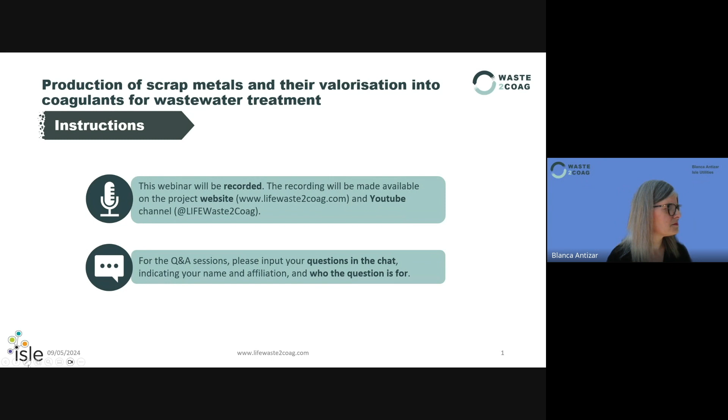So the LIFE Waste2Coag project, as I mentioned, this is webinar number 2 of the project. The focus of this second webinar is on the production of scrap metals and their valorization into coagulants for wastewater treatment. This project is funded by the European Commission through the LIFE program.

The objective of the series of webinars is to raise awareness of the capabilities of the project, targeting a wider pool of stakeholders. We also would like to improve the overall knowledge of the project with a view to responding to market needs, particularly in Europe, but also beyond Europe.

The structure of this series of webinars is as follows. We have 3 different topics that we want to touch upon. The first webinar, which took place in July 2023, was on brine generation - you can access it on our web channels. The second webinar today is on scrap metals and production, which is the topic for today. Then we'll have a third and final webinar towards the end of the year on the use of coagulants.

Each webinar includes at least 2 presentations from stakeholders of the project partners who have experience in the specific topic of each webinar. We also provide an overview of the project for everybody to keep up to date with the purpose of the project and any particular progress.

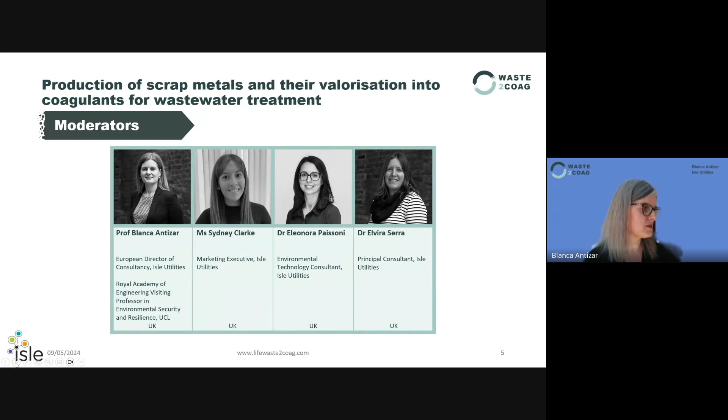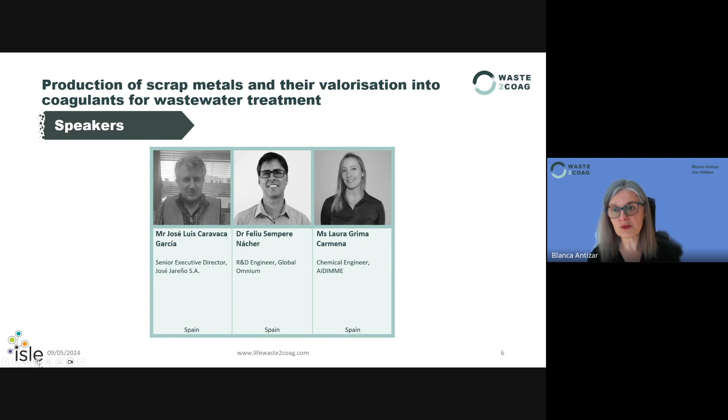So we have 3 speakers today: one expert from the sector, Mr. José Luis Caravaca García, and then 2 project partners, Dr. Feliu Sempere Nácher, and Ms. Laura Grima Carmena from Global Omnium, which is the coordinator of this project, and AIDIMME, which is one of the partners in the project.

The agenda for today is as follows. First is the introduction to the webinar, and we are on that section at the moment. Then I will share the floor with Mr. José Luis Caravaca, who is going to be speaking about ferrous scrap recycling in Spain. We will pause at that time to ask him questions.

So we'll use the questions that you put in the chat for José Luis. Then we'll move into the presentation of 2 of the project partners, Feliu and Laura, speaking about relevant project advances. At that point we'll pause again for questions and answers, and then we'll close the webinar. The webinar as a whole is going to be about 1 hour.

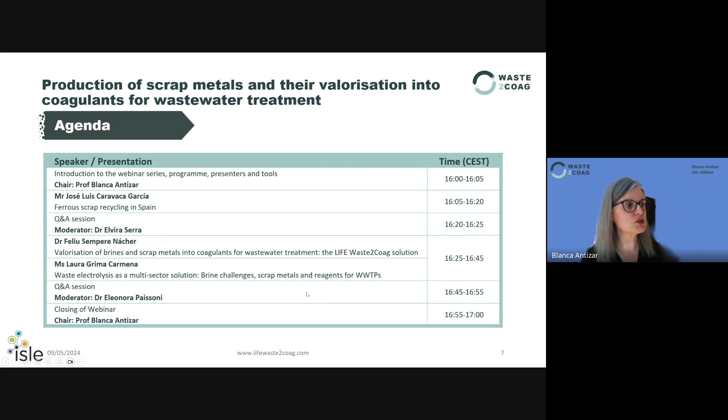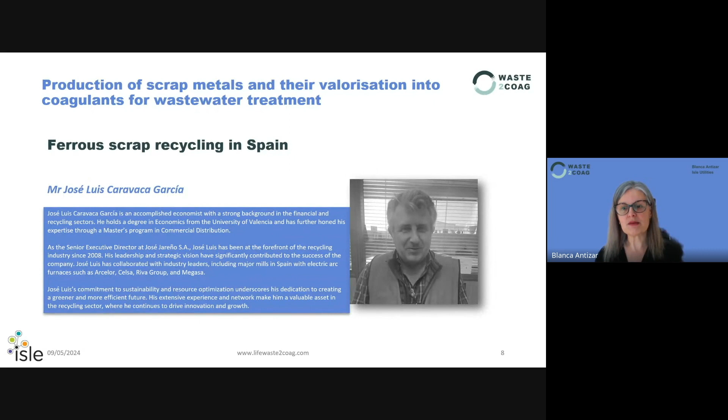So just to introduce briefly, José Luis is an economist with a strong background in the financial and recycling sectors. He's a senior executive director at José Jareño Sociedad Anónima in Spain. José Luis has been at the forefront of the recycling industry since 2008, and I'm not going to be shy to say he has been a pioneer in sustainability and innovation in the recycling industry. We are delighted to have him here today with us. Thank you, Luis, for being available - he will be talking about ferrous scrap recycling in Spain.

We are a recycling and waste management company with extensive experience in the sector. We are always committed to continuous improvement and innovation in our processes and management. We have a team of nearly 100 people with experience, knowledge, and specific qualifications. We own the means and equipment, with machinery specialized in the valorization process.

Don't worry, we have the machinery. We have 3 scrap metal shears, 2 copper wire mills, and 4 scrap balers, and finally, at this moment we are installing a big shredder. On the other side, we have a fleet of vehicles, container on-site collection, and mobile car presses.

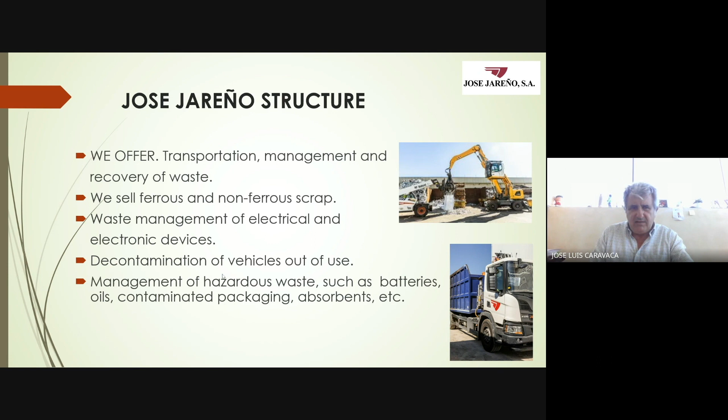You can move to the next one, Blanca. Okay, at this moment I've explained more or less the work that we do here at José Jareño.

Today I arrived a bit late because we had to take on 2 demolitions: one marble factory in Alicante, and the other a farm that was burning for 15 days, a farm of hens and eggs. One of our works is to do demolition.

We buy scrap, ferrous and non-ferrous, from factories. They produce material for new vehicles, like here in Valencia with the Ford company, and many of them work with us. Nowadays Volkswagen is preparing a big plant for batteries, and we work for all of them to pick up the waste, the scrap. That's more or less what we do here in Valencia.

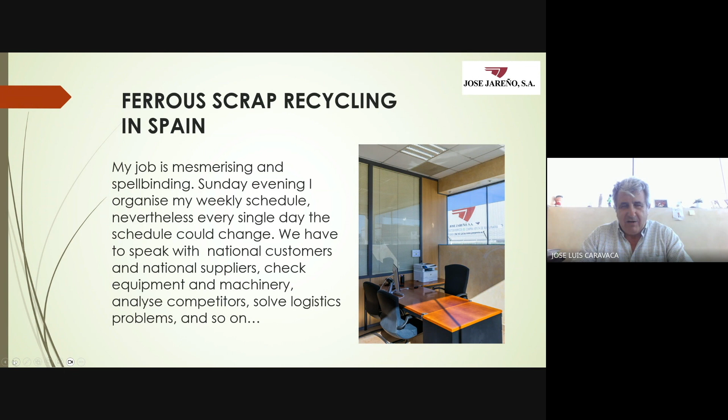We have to speak with national customers to buy scrap. You have to have the price of the sale before you buy, otherwise you don't have the price to sell. We speak with the national customer, the national supplier, to buy, check the equipment machinery, analyze competitors, solve logistics problems. Every moment. Right now I have a phone call about a problem, and after this I will solve it.

What happened? Every day, what happened? Price changing. I came from Madrid this morning. On this trip, I found I had to ask for better prices, changing.

Another thing is competitive movements. I don't work with all the EAF in Spain, all the mills in Spain, I work with several, but not all of them. Then the competitors change the prices, and I have to follow the market, to ask my customers for the better prices. Machinery doesn't work, every day it's broken, every single day.

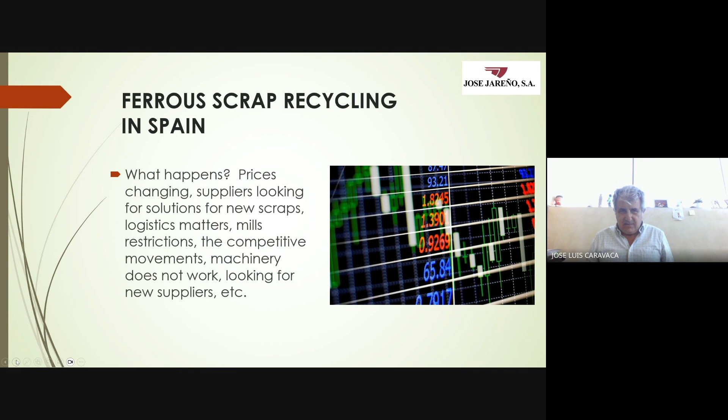You must keep looking for new suppliers because the market is always changing. You need to look for new suppliers.

One problem in the market, in non-ferrous and ferrous scrap, is reputation. We don't have a good reputation, but it's changing. One example is the LME, the London Metal Exchange. You can see this on Google, everybody can check the London Metal Exchange for the prices of metals or scrap, ferrous and non-ferrous, copper and so on. It's intended as a primer for those who want to develop their understanding of how commodities and metal markets work.

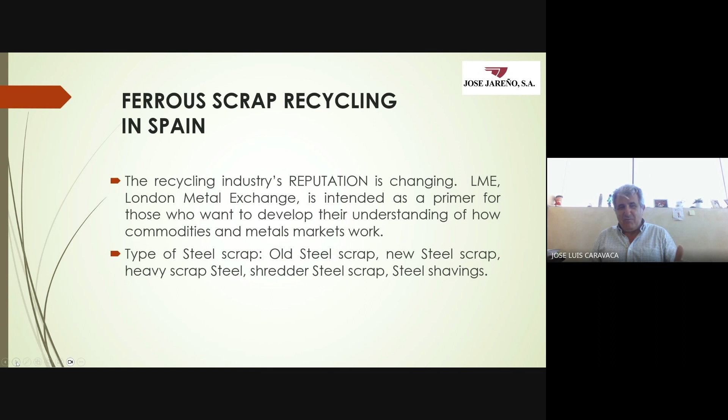Now we'll speak about the type of steel scrap, which is not too complicated: new steel scrap from factories producing cars and so on, heavy scrap steel, shredded steel scrap, steel shavings. The type of steel scrap is easy. The problem is the person who manages the scrap - the customer and supplier - not the scrap itself.

Now we are speaking about the figures of steel in Spain. The steel production in Spain is stable or decreasing. Nowadays the work with steel is more usual in countries like Asia, better than Europe. The steel production in Spain is stable or decreasing because the production is cyclic.

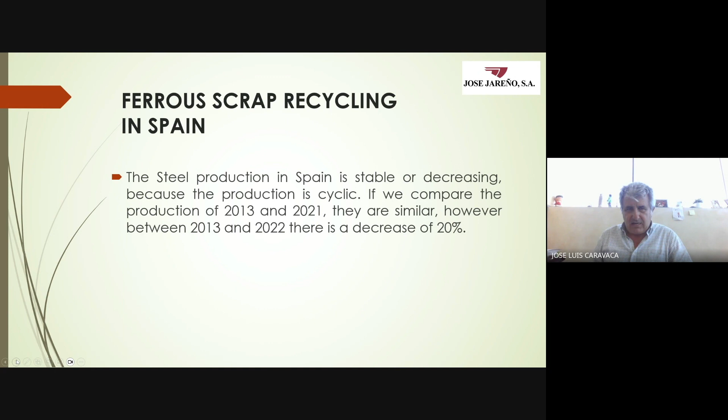If we compare the production of 2013 and 2021, they are similar. However, between 2013 and 2022, there is a decrease of 20%. In the table, worldwide production versus Spanish steel production between 2013 and 2022 shows it had decreased.

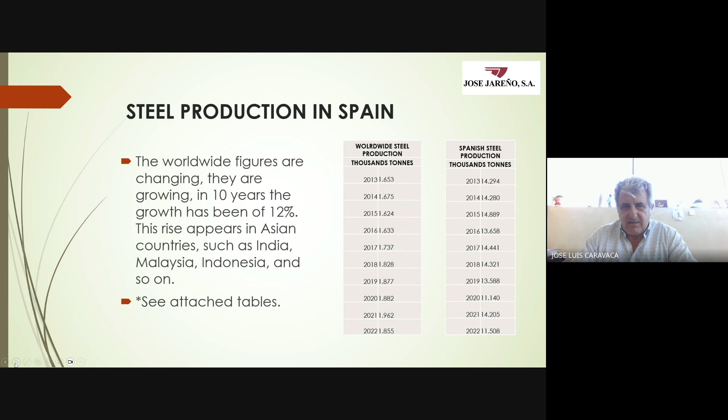After, we can see the map of Spain with the mills working now. The worldwide figures are changing - they are growing. Over the years, the growth has been 12%. The rise appears in Asian countries such as India, Malaysia, Indonesia, and so on. That is the change from Europe to Asia in production.

As for other markets, China is the head of the international market, China is the mover. On the other hand, the Spanish market for recycling has experienced a significant shift toward production via electric arc furnace.

Electric arc furnace was introduced in Spain more or less 60 years ago. Nowadays the technology is working properly, but the number of mills in Spain is decreasing. In 2018, there were 21 operational electric furnaces; nowadays only 15.

If you check the two maps from 2018 to 2023, we can see that in the middle of Spain the mills disappeared - only one remains in Madrid. Five years ago there were 2. Maybe in 3 years the mills in Madrid will disappear too.

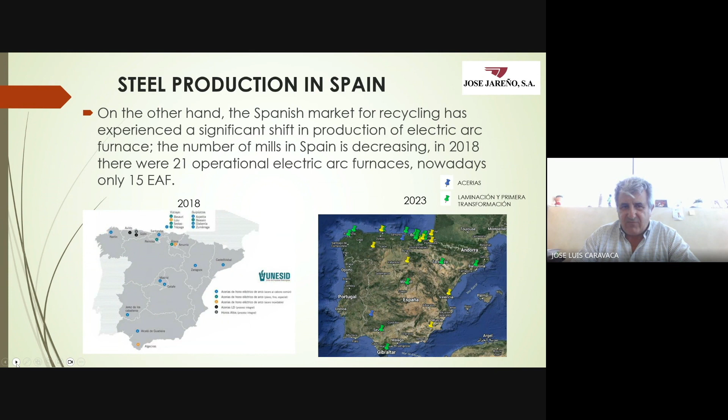We're always looking at both markets, national and international. You cannot sell from Madrid to the international market. We have good luck today, Blanca, because today in Avilés, Arcelor is putting the first stone to build a new EAF.

Then it will shape the future landscape, which is changing. The blast furnace is going to Asia, and in Europe we're always using the EAF, electric arc furnace. That is very important for the environment.

Spain has a negative balance in scrap. We need to import scrap by bulk ships. In Spain we don't have enough scrap; we have to buy scrap from the north of Europe, USA, or South America. We buy it via bulk ships.

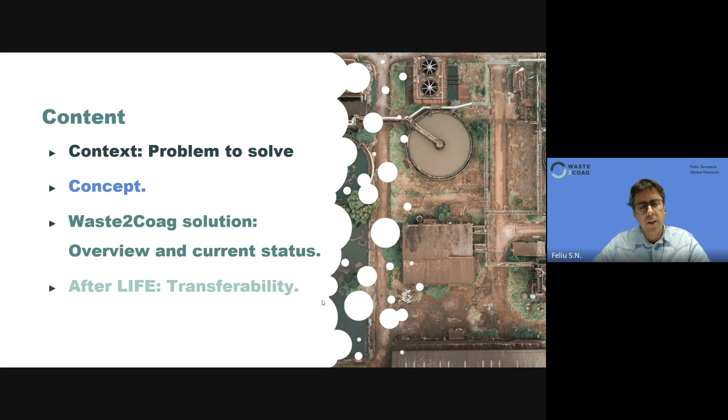I will start with the context, the concept of the waste to coagulant solution, an overview of current status, and also the after LIFE transferability. Okay, the context is the problem to solve.

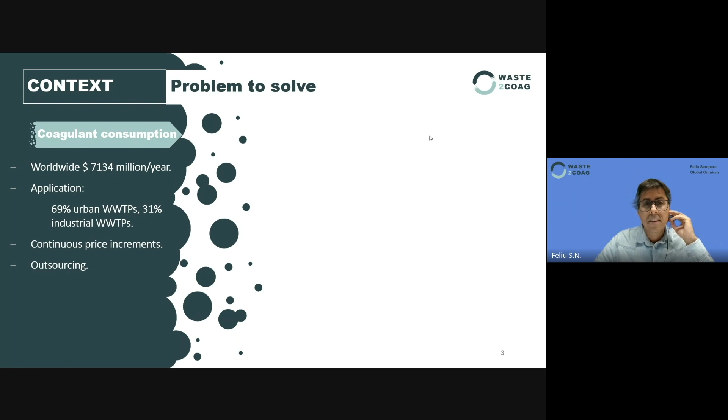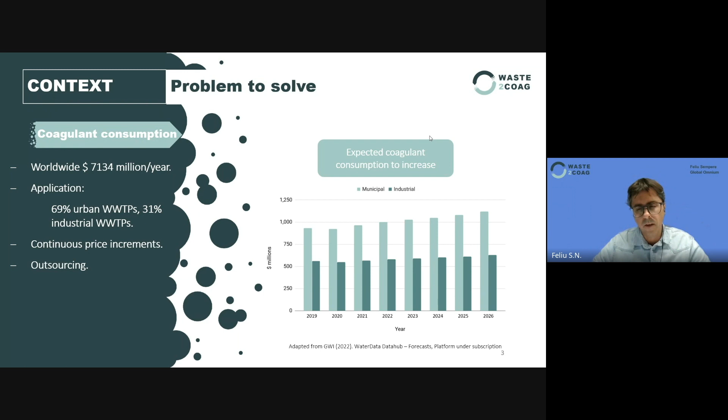We have a high worldwide coagulant consumption, which is applied mostly in urban wastewater treatment plants, but also for industrial wastewater treatment. There is a continuous price increase, and normally we have to outsource this, which indeed, for example in the UK, has led coagulants to be defined as critical goods for industry. And as said, the coagulant consumption is expected to keep increasing, also due to more stringent regulation on final effluent values in wastewater treatment plants.

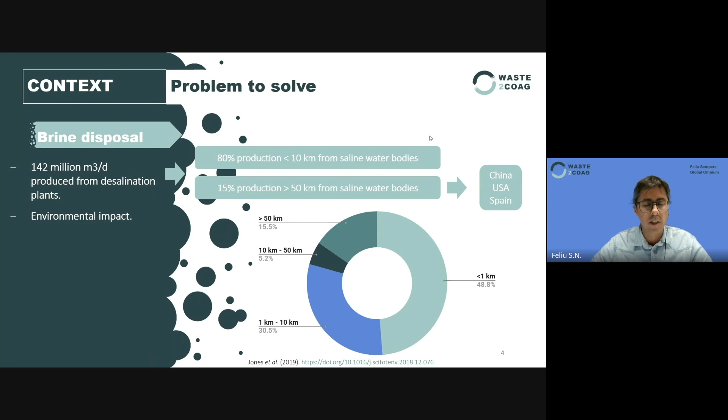Also, there is a huge amount of brine disposal from desalination plants, from 142 million cubic meters per day, also in desalination, but all other industries also produce brines. And of these brines, 80% of their production is released below 10 kilometers from saline water bodies, but 15% of this production is also away from saline water bodies, which complicates its handling, mainly in China, USA, and Spain. And the release of these brines, regardless of where they are released, poses an environmental impact on the receiving bodies.

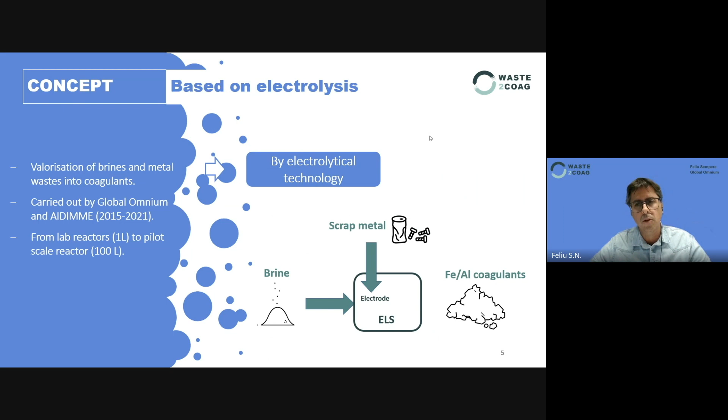So our concept for the project is based on electrolysis with the valorization of brines, both wastes—brines and metal wastes—into coagulants. This was carried out by AIDIMME and Global Omnium since 2015, from laboratory reactors to pilot scale reactors of 100 liters, which was the previous project, using an electrolytical technology to produce iron and aluminum-based coagulants.

Just to highlight what the electrolysis is about: it's applying a continuous electrical current to two metal electrodes to cause a non-spontaneous chemical change. If we use as an anode a sacrificial electrode, steel or aluminum, we are producing a substitute for iron-based coagulants or aluminum-based coagulants like PAC.

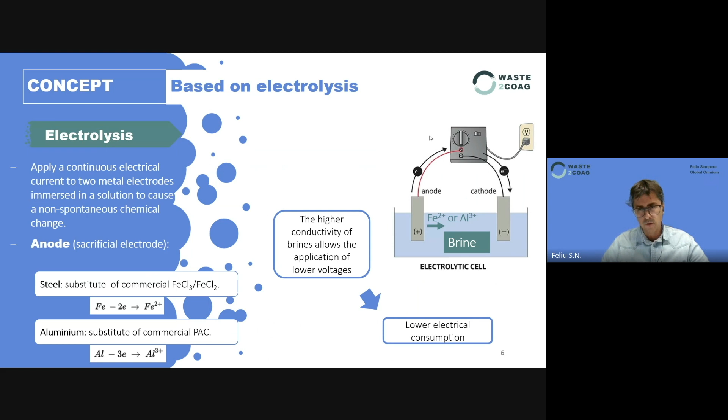Why are we using brines? Because the higher conductivity of these solutions allows us to apply lower voltages, which implies a lower electrical consumption in producing these coagulants.

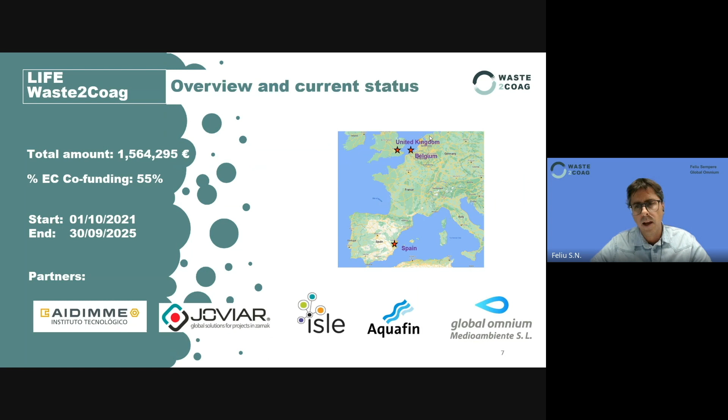This led us to the current project, with a total amount of 1.5 million euros co-financed by the European Commission under the LIFE program. The project finishes after an extended time requested and approved, until September next year. We have AIDIMME, Joviar as partner for industrial wastewater treatment plant, ISLE who is organizing this webinar, Aquafin, a water utility in Belgium, and Global Omnium, also a water utility.

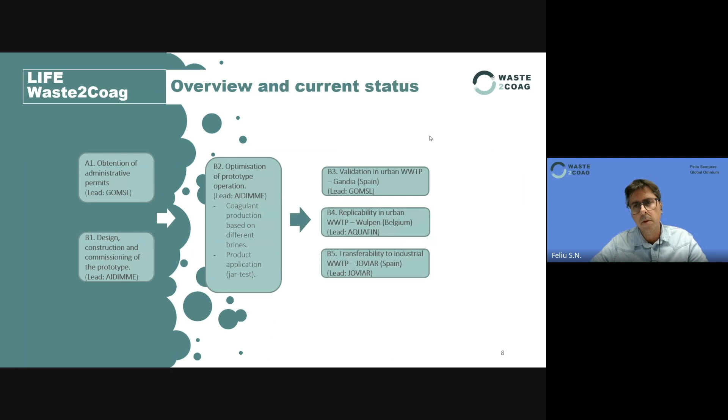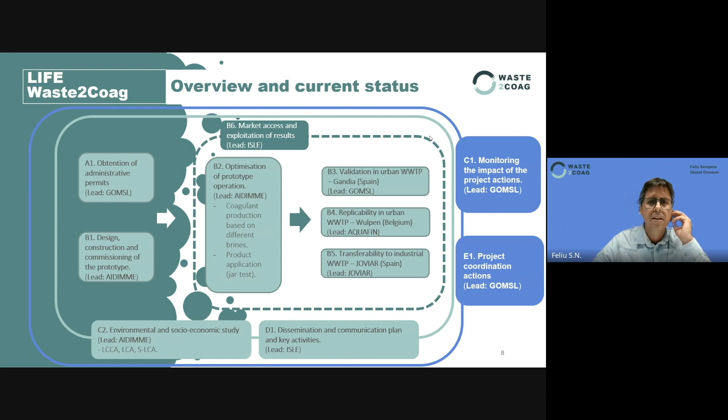Summarizing the project, the packages we have are: obtention of administrative permits; the design and construction of the prototype, led by AIDIMME; optimization of the prototype operation to produce the coagulants; and their application in wastewater treatment, which is an action that just finished. Then there is validation of these coagulants in urban wastewater treatment plants in Spain and Belgium, and also in an industrial wastewater treatment plant in Joviar in Spain. ISLE is leading the market access and exploitation of results, and we also have environmental and socioeconomic studies of the solution, dissemination activities, and finally monitoring the impact of the project, and of course its coordination. Today we are in action B5, the transferability to the industrial plant in Joviar.

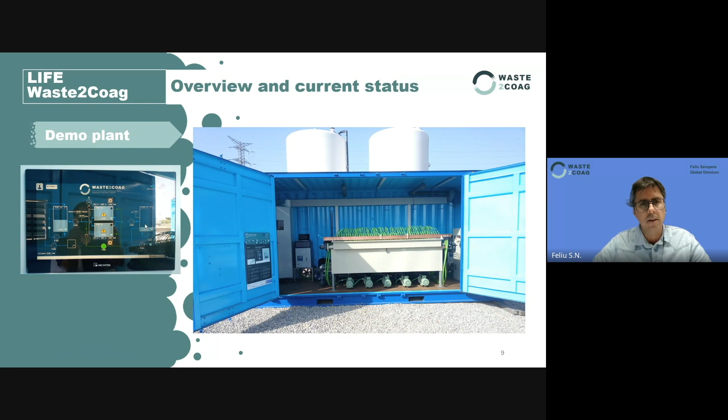Here you can see a picture of the HMI of the plant, showing the schematics of the process: a receiving tank for the brines, the electrolytic reactors which we see here in the picture on the right side, and then a receiving tank for the coagulants, from where they are dosed to the wastewater, industrial or urban.

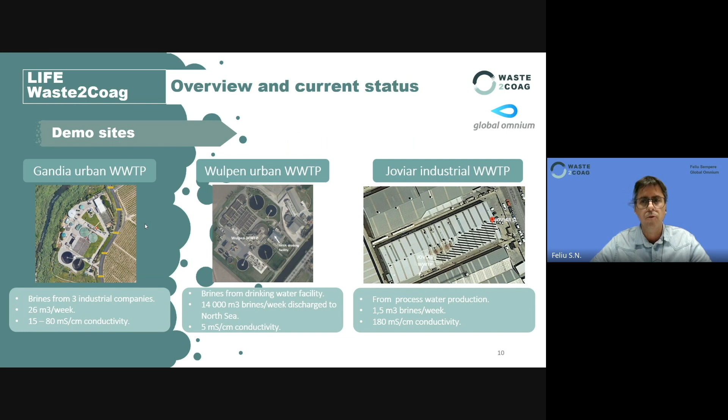We have 3 demo sites: 2 urban wastewater treatment plants with different brine characteristics and from different origins, and also an industrial wastewater treatment plant to transfer the results to a totally different type of wastewater, dealing with a different amount and conductivity of the brines produced, which are from the same factory.

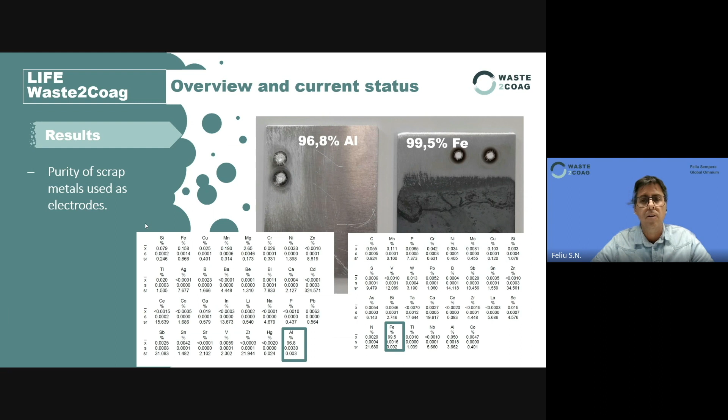As a result, we checked the purity of the scrap metals used as electrodes and compared them to commercial electrodes. What we saw is that the purity of these metals was very high, with about 96% aluminum content in the case of aluminum, and almost 100% content in the case of iron.

And this is done using a lower energy consumption per kilogram of metal, compared to previous projects where we had values as high as 60 kilowatt-hours per kilogram of aluminum. This is a result of the high conductivity of the brines that we are treating in this project.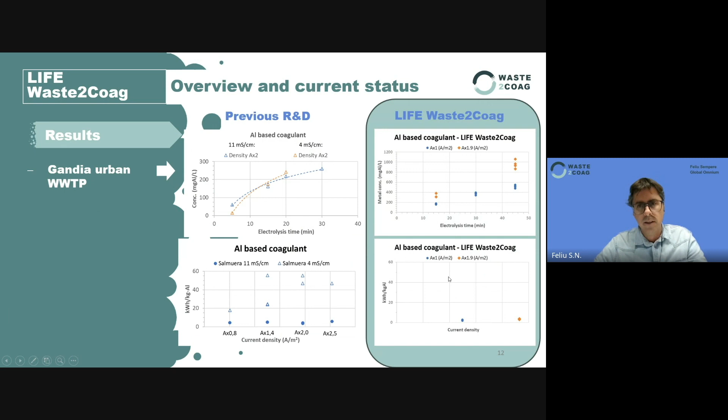We also evaluated the toxicity of these coagulants using respirometry tests, both on autotrophic bacteria responsible for nitrification and on heterotrophic bacteria. We ran trials with activated sludge to evaluate oxygen consumption via respirometry, and also activated sludge combined with the alternative coagulants we are producing.

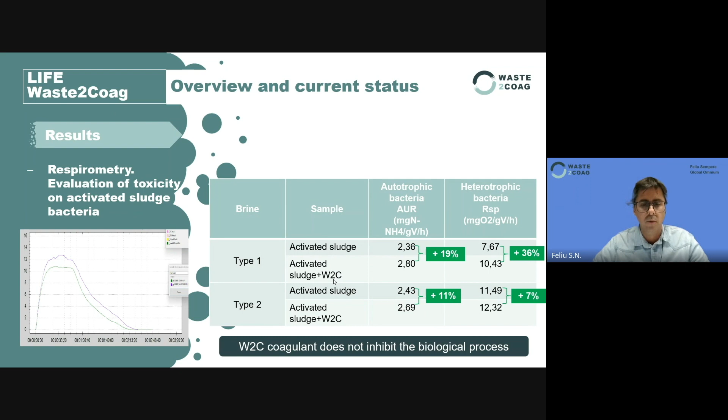What we saw is that there is indeed a boosting of respirometry in both types of bacteria. The objective was not to boost respirometry, but to check if there was any inhibition of the biological process. These results clearly demonstrate that the coagulants are safe to be applied in biological reactors, such as those used in urban wastewater treatment plants.

Looking forward, after the end of the project we are looking for transferability to test different types of brines, initially maybe at laboratory scale and afterwards in the demo plant, and also to apply our coagulants to other different types of wastewater.

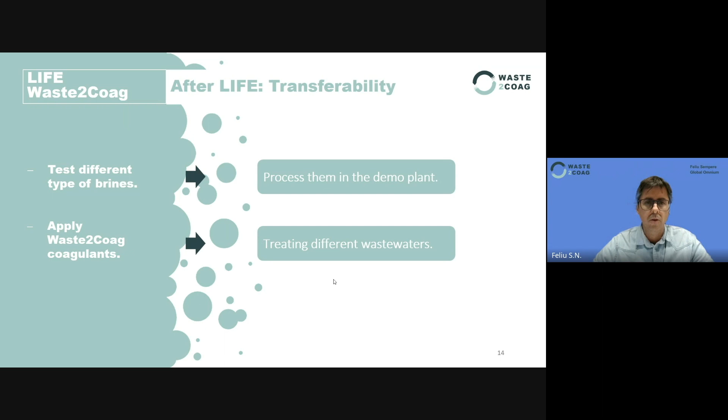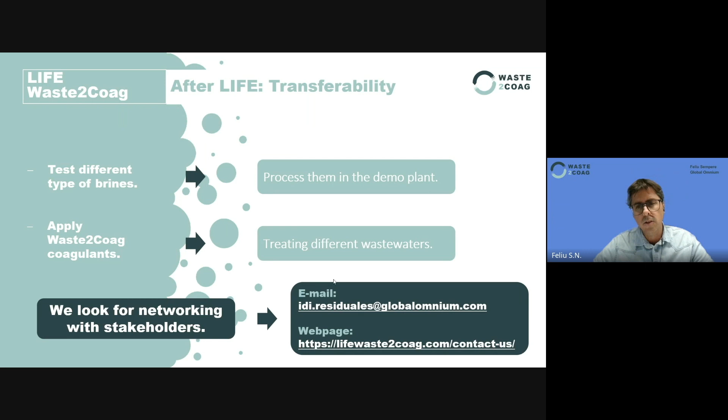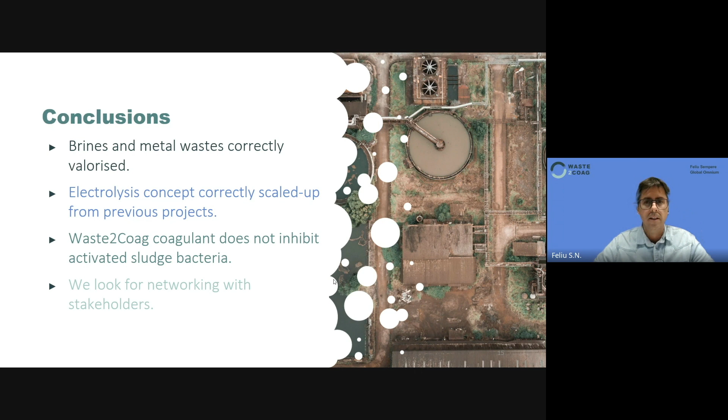To finalize, the conclusions are: the brines and metal wastes are correctly valorized; the electrolysis concept has been correctly scaled up from previous projects; and these coagulants are safe to be applied in activated sludge reactors. We look forward to networking with other stakeholders. Thank you for your attention, and if you have any questions, I'll be happy to answer them.

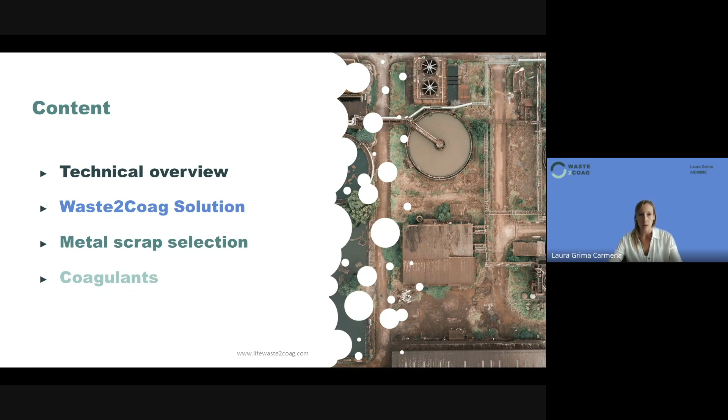Okay, as you know, this is a multi-sector approach because all the different streams of the project come from very different industries. As you know, the main objective of the project is to generate high-quality coagulants, which are going to be used in the wastewater treatment plants, both from industrial plants and the wastewater treatment plants. For that, we need to control the key parameters of the electrolytic system, and we have to be very careful with the inputs of this plant. On the one hand, we have the brines, which are the high conductivity liquids that come from desalination plants and from industrial plants. And on the other hand, we have the scrap metals that come from the metal industry. The focus of today's webinar is going to be the selection of these scrap metals, okay?

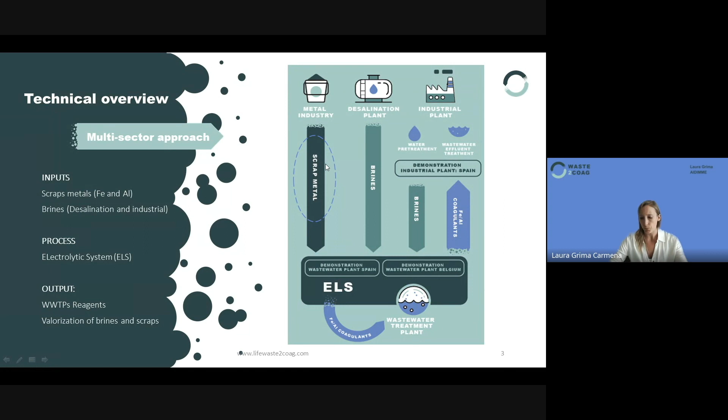A quick review: coagulation is a wastewater treatment in which we destabilize the polluting particles from water so they can settle and be removed from the water. Conventional coagulation does this by means of the addition of reagents, chemicals such as iron and aluminum salts. In electrocoagulation, we do the same, but by the use of electric current, so we can generate the active species directly in situ. But what is the main difference between electrocoagulation and the electrolytic system that we are using in this LIFE plant?

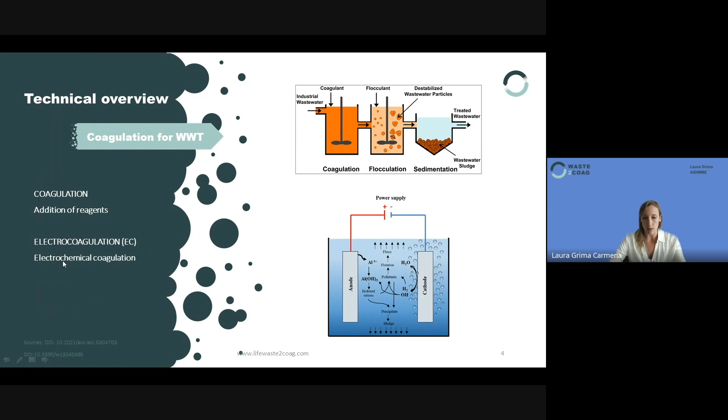Here we are going to see the comparison between electrocoagulation and our system. First, the objective of electrocoagulation is normally wastewater treatment, while in our case, we want to produce coagulant and valorize the wastes, both the metal scraps and the brines.

As for the electrodes, in electrocoagulation, normally we use commercial electrodes, while in the electrolytic systems of the lab, we are looking to valorize the metal scraps, which are normally cheaper, and it's good for the environment because you are valorizing these wastes. On the other hand, the electrolyte in electrocoagulation is normally the wastewater that you want to treat. In our case, we use the brines, which are high conductivity liquids, meaning we use lower power consumption, and we prevent them from being released to the environment, which is harmful for the ecosystem because of the high salinity of these liquids.

Besides, regarding versatility, electrocoagulation is normally a standard process, while in the LIFE Waste2Coag project, we have to cope with a wide range of qualities, both from the metal scraps and the brines, and also we have to be able to deliver a wider range of qualities of the coagulant, depending on the necessities of the end users. The input and the final requirements are usually not the same.

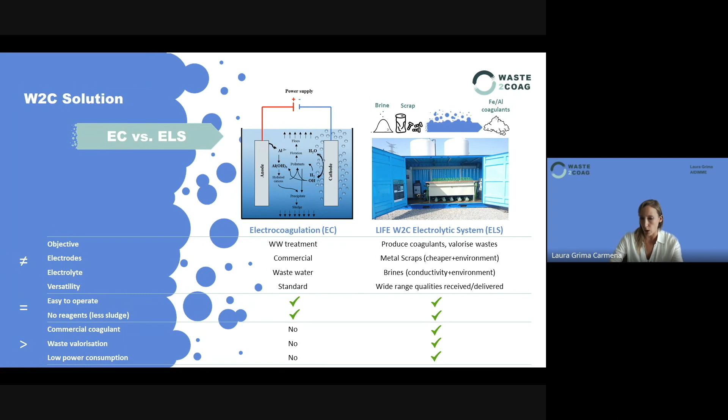As for the scrap metals, this is obviously not a direct operation. For the metal selection, we will talk about the quality in the next slide. About the price, no one can guarantee a stable price nowadays, but at least we are looking for a lower price than the commercial electrodes. As for the shape, the scrap market has a wide array of shapes going from profiles, coils, corners, and in our case we are limited by the reactor configuration because we are using a filter press configuration.

As for the thickness, dimensions, and quantity, these are physical specifications that depend on the quantity of coagulants produced. The more weight, the more metal we can dissolve, so we have to make sure the thickness is enough to withstand the project duration for the coagulants we want to produce. For dimensions and quantity, they are defined by the current density we want to apply in our process, so we have to shape and define this as well.

Finally, we had to look for good availability—of course the metals have to be ready for when we want to buy them in the process. Last but not least, we had to seek and select the supplier that met all these requirements, which is not easy.

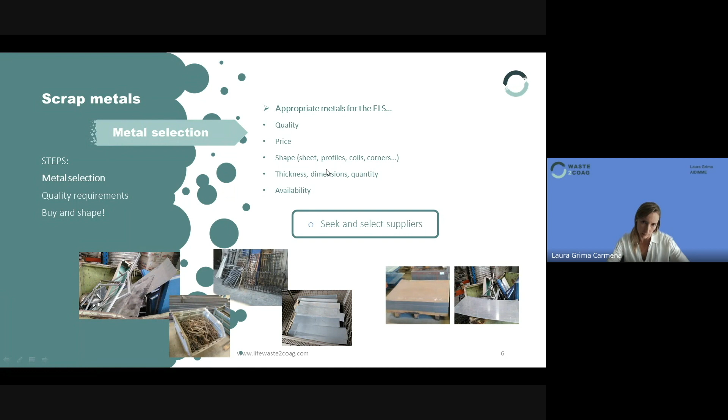Then the quality requirements, as we have said, not everything is welcome in this plant. We are looking for the highest purity of the metals, or else we can contaminate water, inhibit the biological treatment, or obtain a low quality of coagulants because of impurities that the metals may contain.

For example, in the case of the iron electrodes, the use of stainless steel or galvanized steel is directly not allowed because they contain a high amount of chromium or zinc. For the aluminum electrodes, we are looking for the series 1000, 5000, and 6000 because they contain a low amount of alloying elements, such as manganese, zinc, and copper. So we are looking for both of them a high purity.

In the project, what we did was first buy some scrap metals and compare this quality to the commercial electrodes. We took some samples and compared their purity using spark emission spectroscopy, giving great levels of purity: 99.5 for the iron, and 96.8 for the aluminum, which was really good.

Besides this, we did some validation tests in the lab using the maximum current density just to check that the dissolved impurities were within the limits of discharge. So everything was safe for the biological treatment and the discharge parameters.

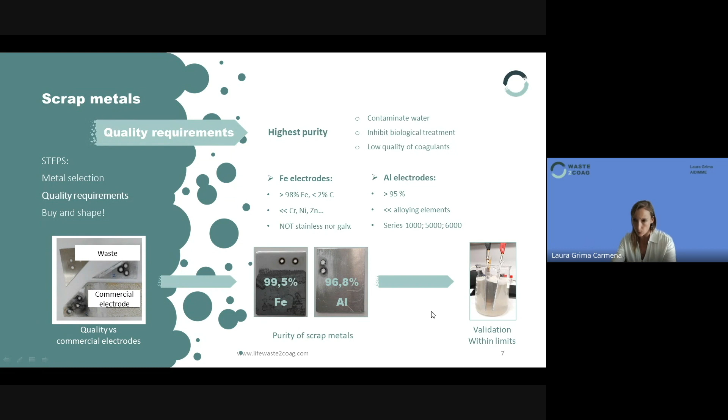As these results were good, we considered that the electrodes were suitable to produce the coagulants. We bought all of them, and after that we proceeded with the installation of the electrodes in our electrolytic system.

We bought them, then we had to take a lot of measurements of the electrodes. As you see here in the presentation, we used a wooden electrode to check that they fit inside the reactor.

Regarding the connections, nothing is left to chance. The section of the connections had to be carefully calculated considering the different conductivities of the iron, aluminum, and copper wire, to make sure they could resist the current that was going to flow through them, making everything safe.

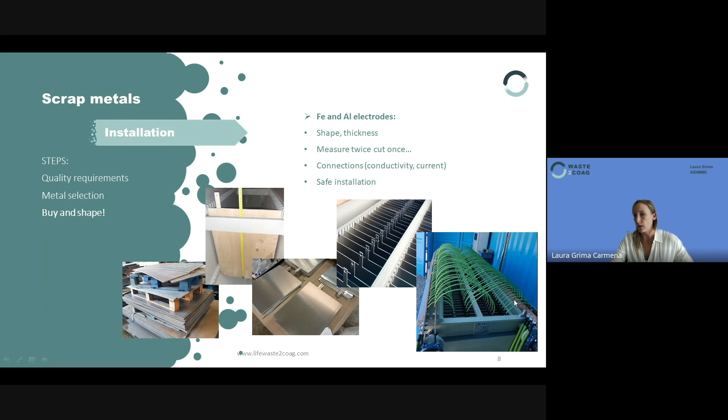All the anodes are connected to one side of the plant, to this bus bar, and all the cathodes are connected to the other side of the plant, just for the sake of safety, so the operators can be safe as well.

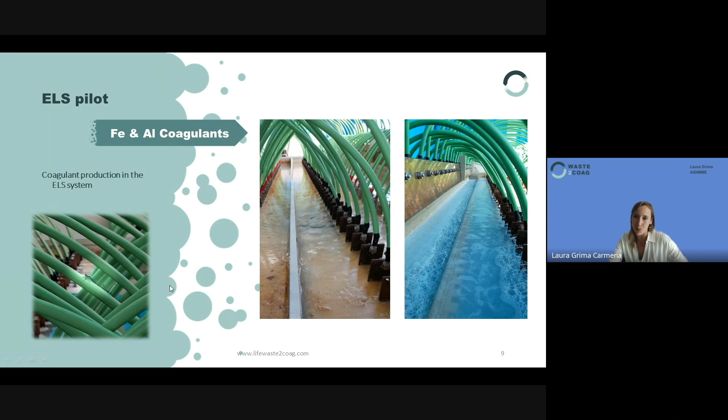Finally, we are showing you some pictures of the coagulants. On the left is the iron coagulant, and on the right is the aluminum coagulant that we have produced in the plant. And of course, we have here the VIP visitor that came once to the plant, the dragonfly.

As conclusions, we have overviewed the process and seen the advantages of the LIFE Waste2Coag solution. We could valorize the scrap metals into coagulants at a pilot scale and generate good results. Finally, we would like to emphasize that there is no magic here. Everything has been calculated, and the design of the plant has been based on the coagulants we aim to produce, as well as on the operational parameters.

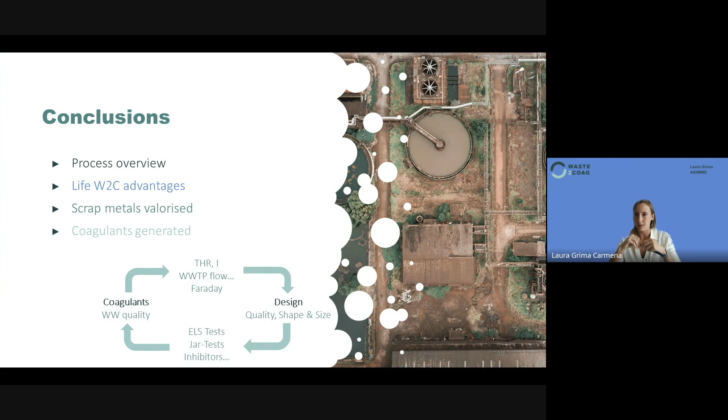Depending on the validation results that we checked for the efficiency of the coagulants, we had to optimize the production again. So everything is an iteration, which means that a lot of work has been done, but there is still a lot of work that needs to be done.